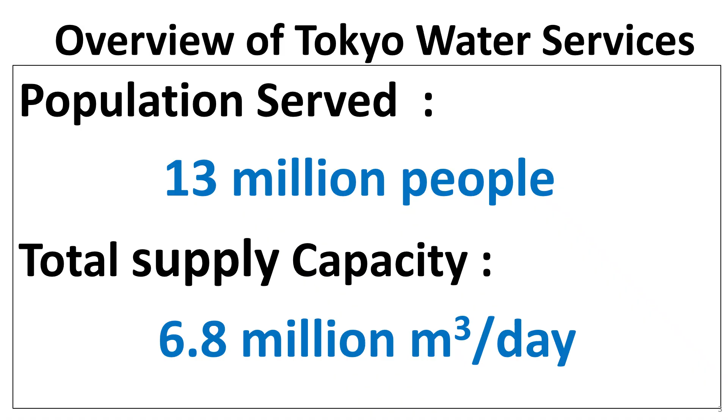I would like to show you what non-revenue water is in Tokyo. Now, the revenue water rate in Tokyo is 96%. The non-revenue water rate is 4%. The leakage rate is 3.5%, and others are 0.5%.

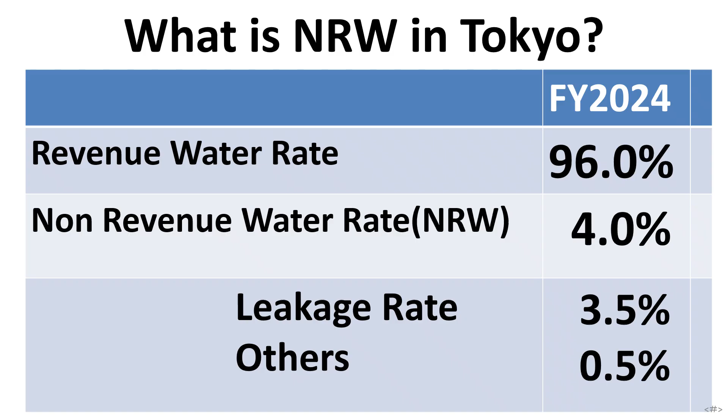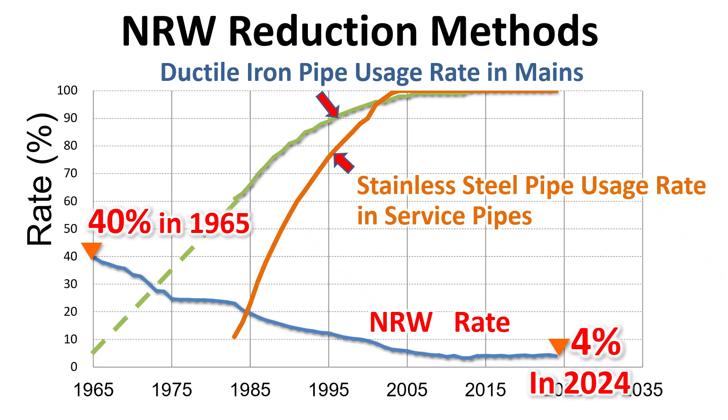This graph shows you the change in the materials used to make pipes, including the switch to ductile iron and stainless steel, and the reduction in the non-revenue water rate. 60 years ago, its rate was 40%, but the current rate is only 4%. These changes not only reduced the non-revenue water rate, they also helped strengthen the pipe networks.

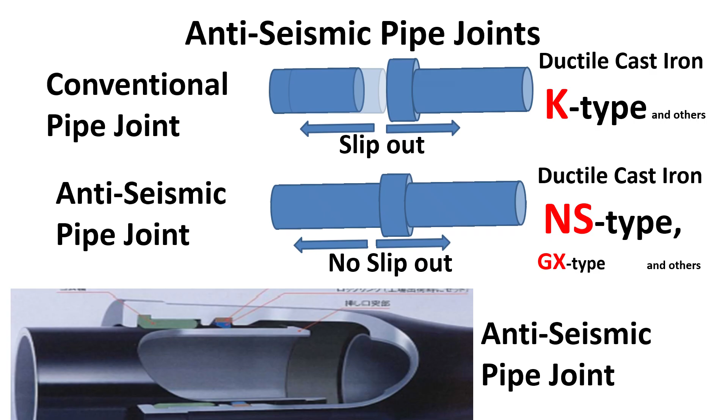Now I would like to focus on the anti-seismic pipe joint. Conventional pipe joints do not withstand strong earthquakes, which results in slip-outs. On the other hand, anti-seismic joints can help prevent this phenomenon. Tokyo Water adopted completely anti-seismic joint pipes after the 1995 Kobe earthquake.

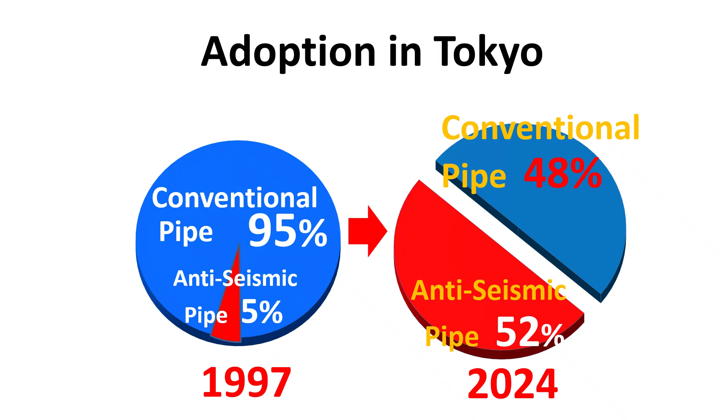Anti-seismic joint pipes as a percentage of the total number of Tokyo Water's pipes gradually increased from 5% in 1997 to 52% in 2024. That percentage is expected to increase to 66% by 2035. About 1.3% of the network is scheduled for conversion annually.

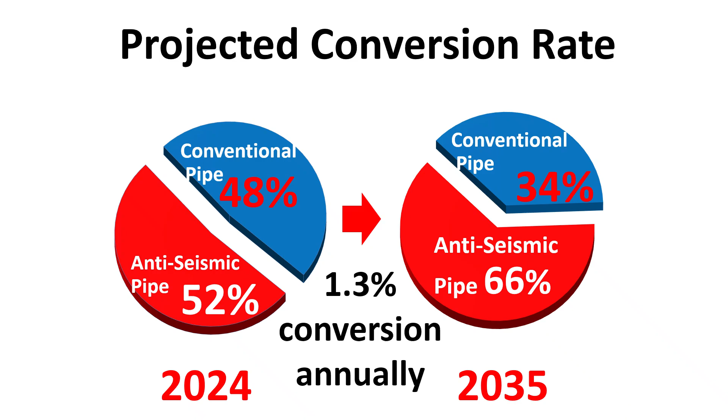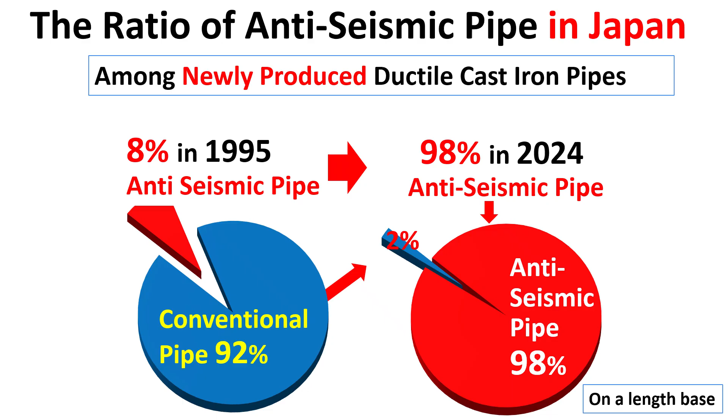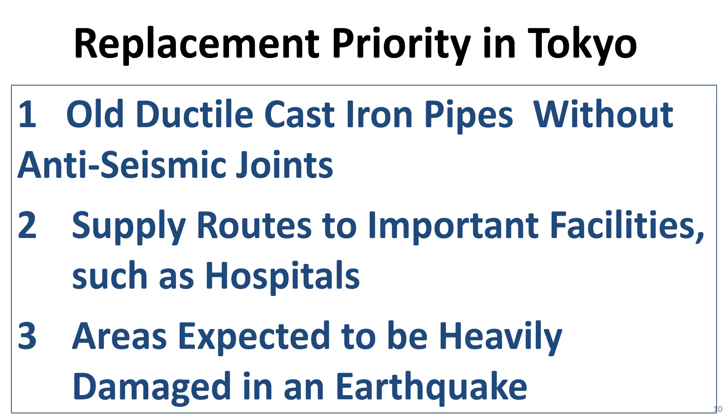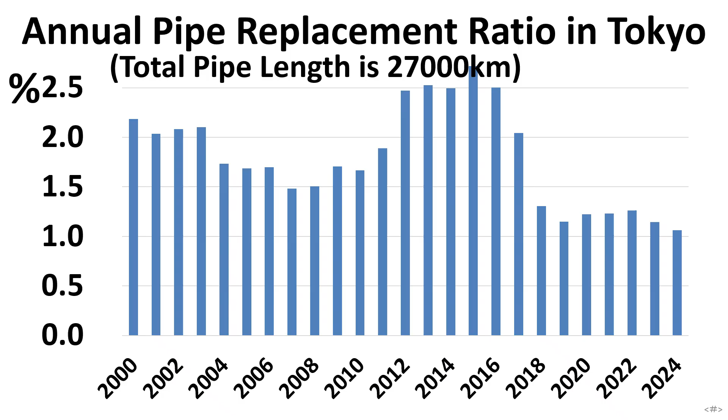This graph shows you the annual pipe replacement ratio in Tokyo Waterworks. Unfortunately, its ratio is recently reducing. Why is the pipe replacement ratio not progressing in recent years? The annual volume of pipe replacement in Japan has been decreasing for 20 years. Shockingly, it is now less than half of what it was 2 decades ago.

Looking at the breakdown, the replacement of ductile iron pipes, the mainstay of the system, has dropped to 40% of its former level, while polyethylene PE pipes are on the rise. The use of polyvinyl chloride PVC pipes has plummeted, resulting in a combined total for plastic pipes that is only 49% of the volume seen 20 years ago.

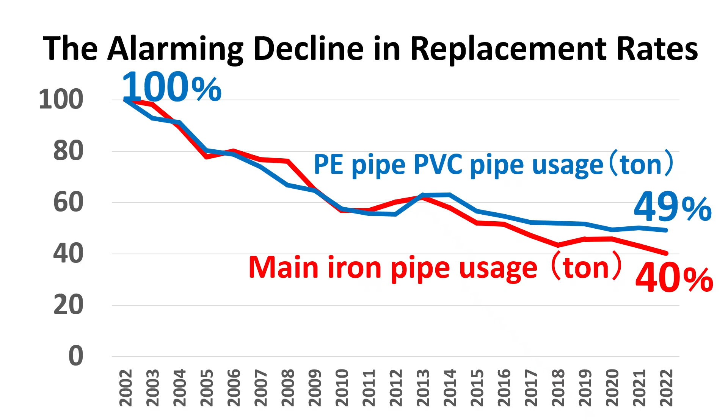The replacement rate is annual replacement length divided by total network length. It has fallen from an average of 1.4% 20 years ago to a mere 0.6% recently. At a rate of 0.6%, it would take over 150 years to replace everything.

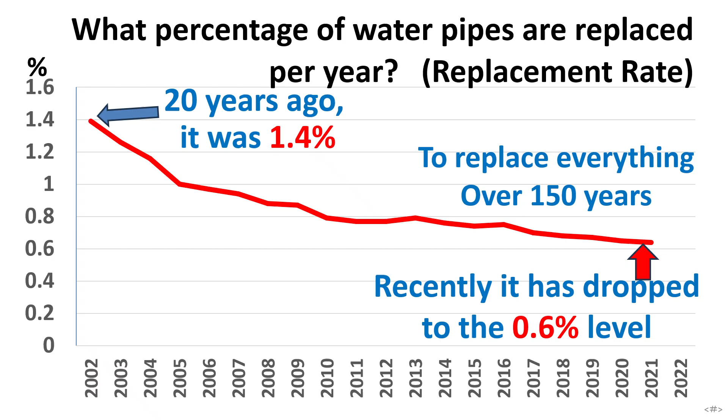Consequently, even in the 20 major cities where efforts are relatively high, the average seismic resistance rate is only about 30%. At current speeds, it will take another century to complete the task.

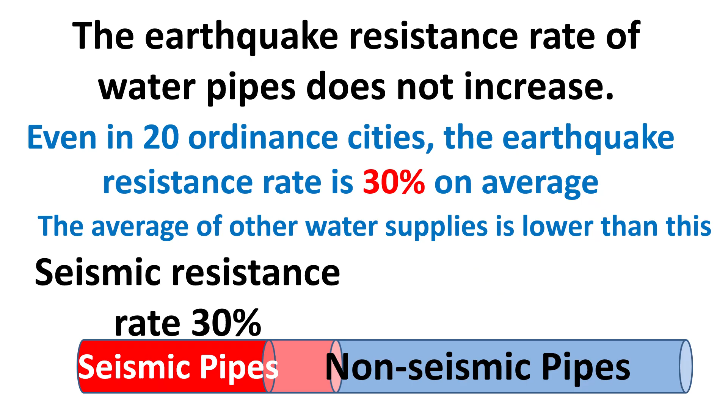Why is progress so slow? One major factor is a surge in the unit replacement cost: total annual construction cost divided by replacement length. In Tokyo, this unit cost is now 2.5 times higher than it was 20 years ago. Even with the same budget, we can only replace 40% of the lengths we once could.

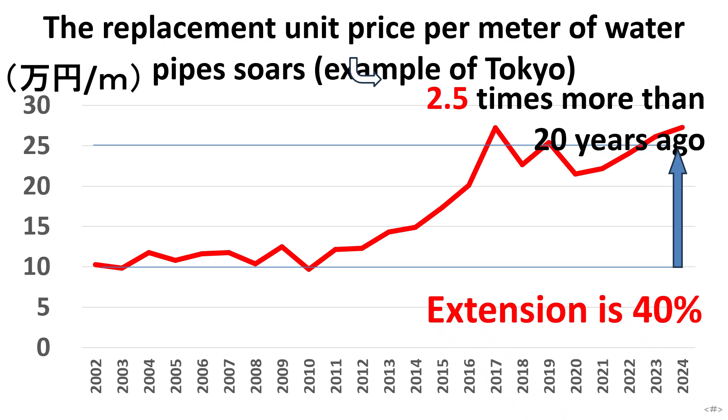This is due to a complex mix of factors. Labor shortages and low profitability for contractors have led to frequent failed bids where no one bids, which in turn drives up contract prices.

Another factor is a decline in water revenue. Total revenue nationwide has dropped from 3 trillion yen to 2.6 trillion yen, a 12% decrease over the last two decades.

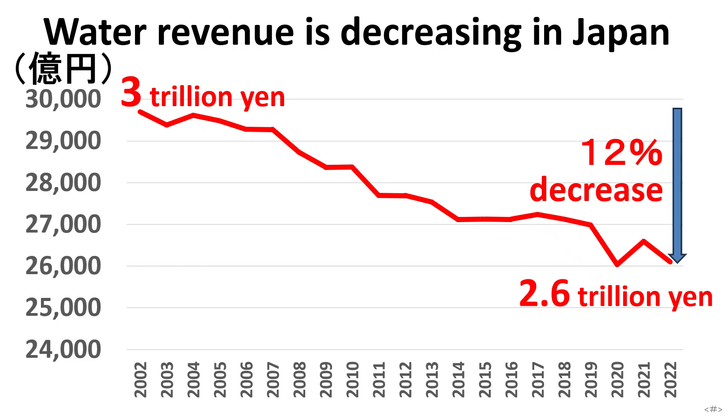The causes include a shrinking population, lower per capita usage, and a decrease in high-volume users. The fact that water rates have not been raised during this period is also a major contributor.

The left side shows spending from 20 years ago, and the right side shows current spending. As essential expenses like electricity costs rise, water utilities are forced to delay pipe replacements to balance their shrinking budgets.

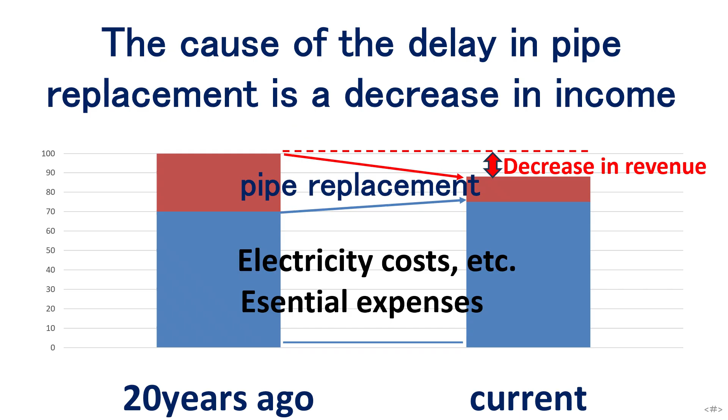Now, I would like to talk about where water leaks occur in Tokyo. The repair of service pipe leaks accounts for 97% of the total number of leak repairs on the distribution system up to meters.

Therefore, it is very important to reduce service pipe leaks.

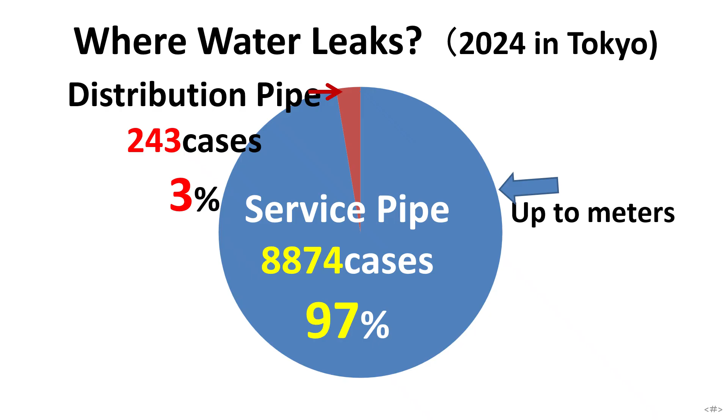This picture gives us a general idea of the boundary of responsibility between a utility and a customer. In Tokyo, that boundary point is at the water meter, although service pipes themselves actually belong to customers.

A stainless steel service pipe is installed underground between a branch fitting from the main under a public road and the water meter on a customer's private property.

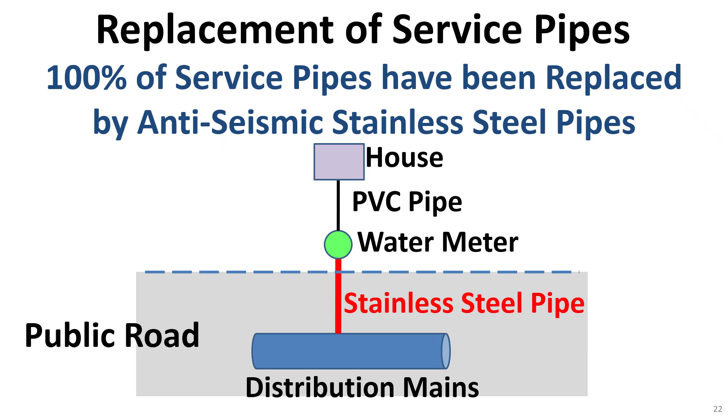For the pipe material, Tokyo Water chose SUS 316 over SUS 304. In 1980, although it was more expensive initially, it withstands corrosion much better and requires less post-installation maintenance.

In 1998, we added a corrugation to these pipes. Combined, this gives us highly flexible, corrosion-resistant service connections that handle earthquake stress well. This is the same as the one used in Taiwan.

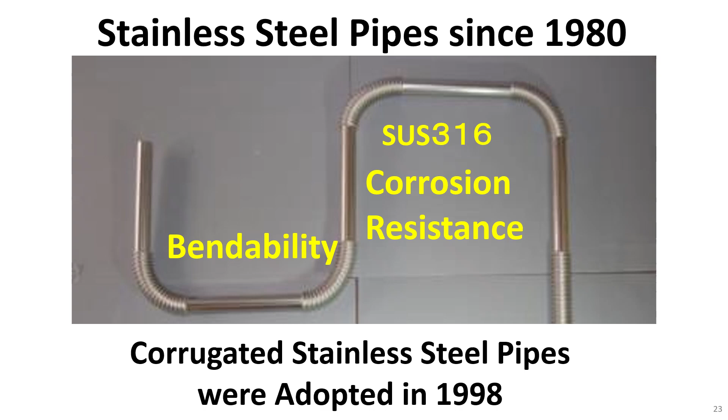Please let me explain another problem with service connections. Around 15% of customers' lots do not face public roads, and service pipes to those customers pass under private roads. One result was the creation of weak PVC pipe connections.

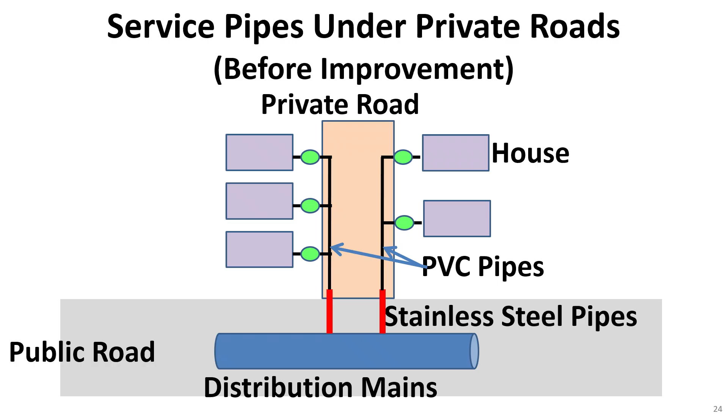In 1995, Tokyo Water addressed this problem to reduce the risks of leaks and earthquake damage, and that plan was accelerated after the 2011 Great Earthquake.

Tokyo Water has installed distribution mains under private roads and replaced PVC pipes with stainless steel pipes up to meters. And at the end of mains, a fire hydrant is installed. Of course, those distribution mains are anti-seismic ductile cast iron pipes, which we call NS type or GX type.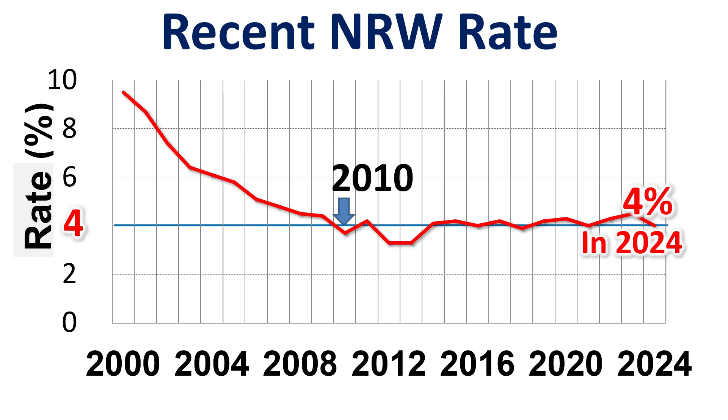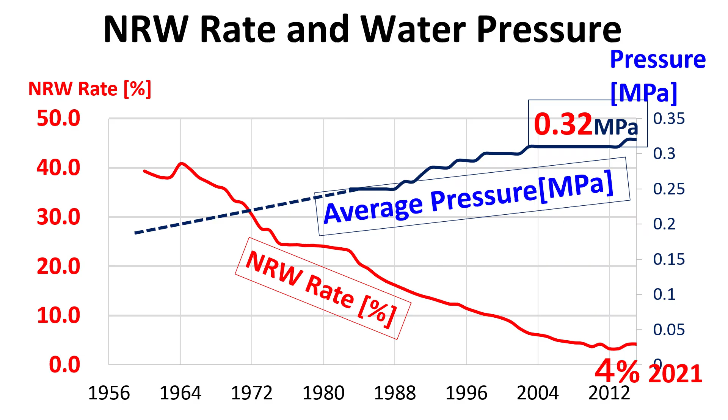In Tokyo, we have increased the water pressure so that even three-story buildings can be directly connected to the water supply. In these circumstances, we have been lowering and maintaining the non-revenue water rate.

I would like to talk about why replace the pipes again. The first reason is that water supply is not suspended in case of earthquakes. The second reason is to reduce the non-revenue water rate. Recently, earthquake countermeasures have become more important than non-revenue water reduction in Tokyo.

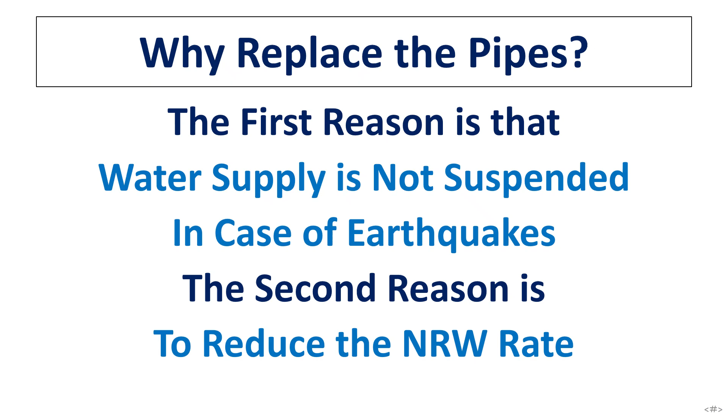I also talk about cost effectiveness of pipe replacement. I think cost effectiveness is a little weak from the viewpoint of only non-revenue water reduction. However, it is very strong from the viewpoint of earthquake countermeasures in Tokyo.

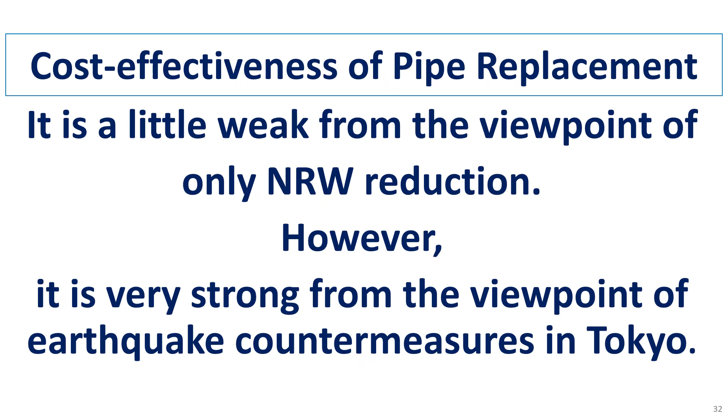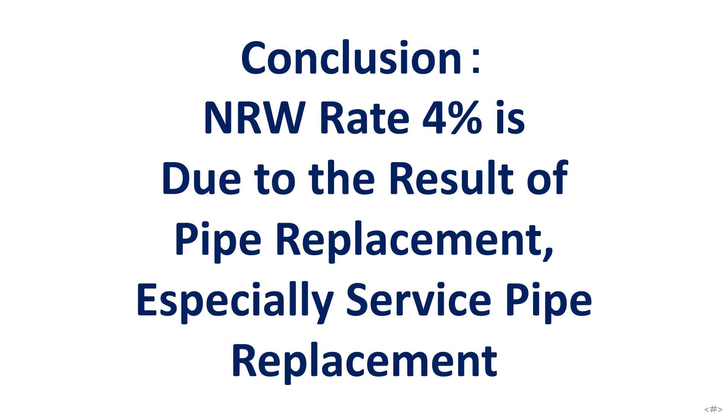In conclusion, the non-revenue water rate of 4% is the result of pipe replacement, especially service pipe replacement. I would like to emphasize that pipe replacement contributes not only to keeping the non-revenue water rate at 4%, but also to earthquake countermeasures, to keeping water quality clean, and to gaining the trust of citizens.

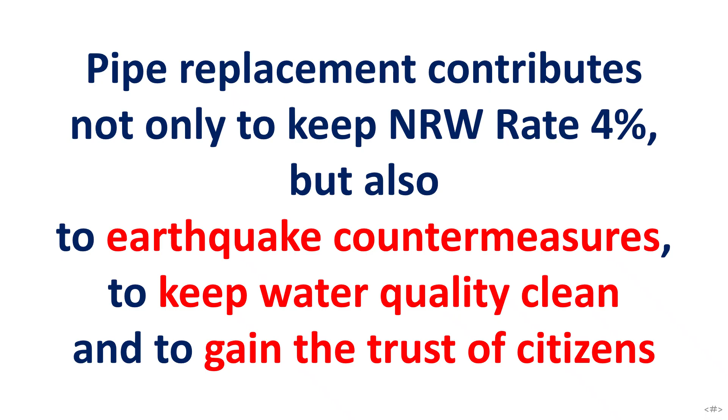From now on, I'll talk about ESG initiatives in Tokyo Waterworks. Tokyo Waterworks Bureau announced ESG initiatives in 2025. From now on, I will introduce some important topics from among them.

This picture shows a water supply station with a direct water distribution pump, which was completed in 2023. This system has two characteristics utilizing receiving water pressure. One is that there is hydropower generation before entering the reservoir. The other is that there is a direct water distribution pump using receiving water pressure. This water is distributed in combination with pump water from the reservoir.

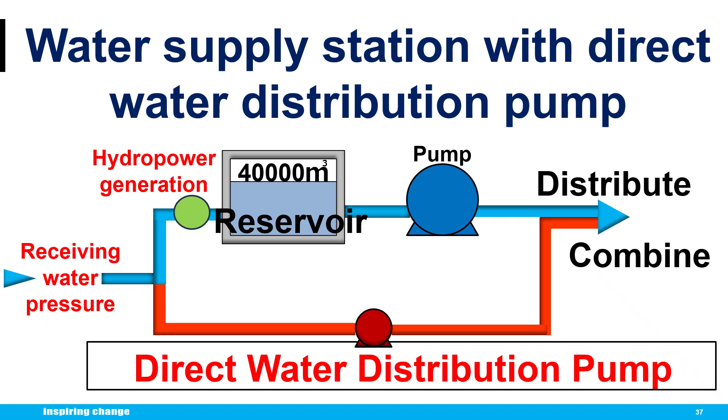Next, I will show you the introduction of solar power and hydropower. The total output of solar power is 10 megawatts, while the total output of hydropower is 3 megawatts.

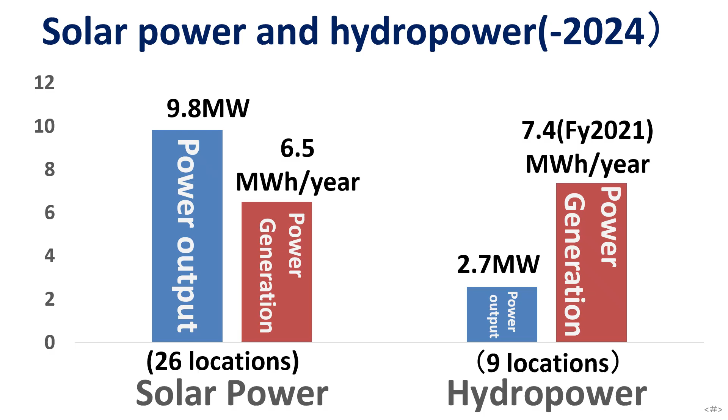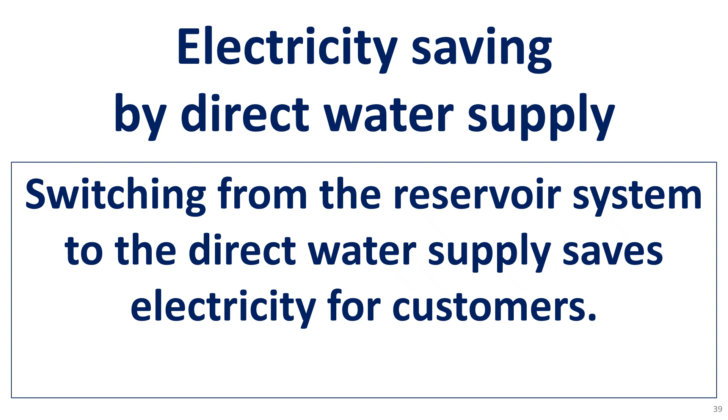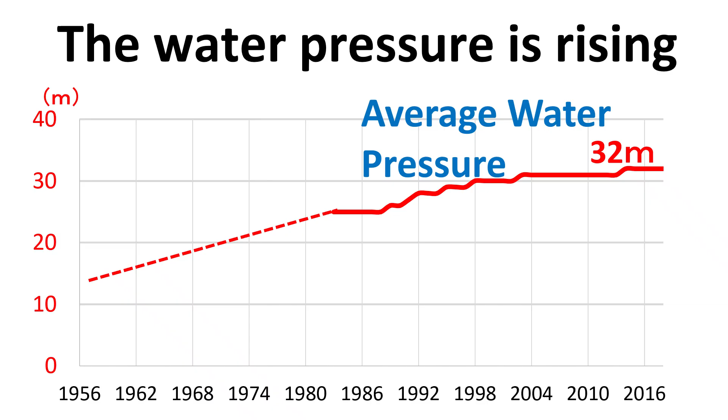Next, I would like to talk about electricity saving by direct water supply. Switching from the reservoir system to the direct water supply saves electricity for customers. As I mentioned before, the water pressure is rising gradually. A three-story building is supplied with water directly without a pump everywhere. The minimum water pressure is 20 meters and the average water pressure is 32 meters.

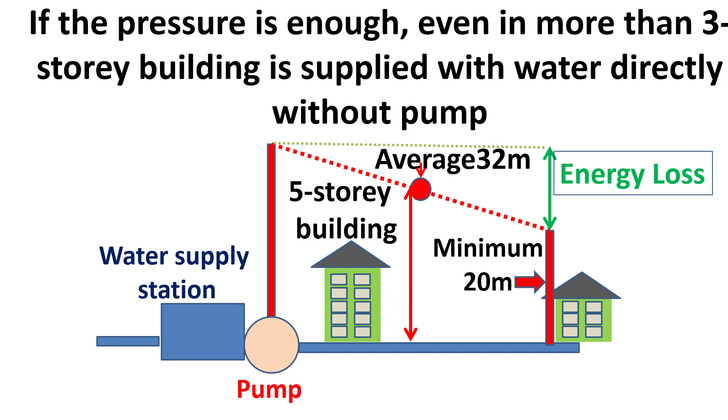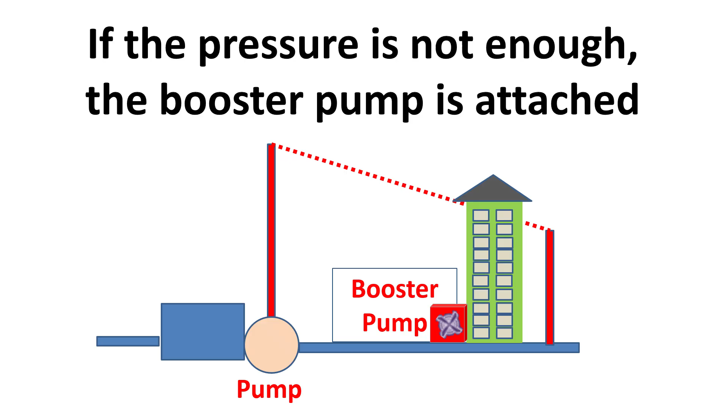If there is enough pressure, even buildings more than three stories are supplied with water directly without a pump. If the pressure is not enough, a booster pump is attached. In buildings with more than 16 floors, an additional booster pump is attached to the middle floor to supply water.

The percentage of direct water supply in newly built buildings with 3 stories or more in 2024 in Tokyo is over 90%.

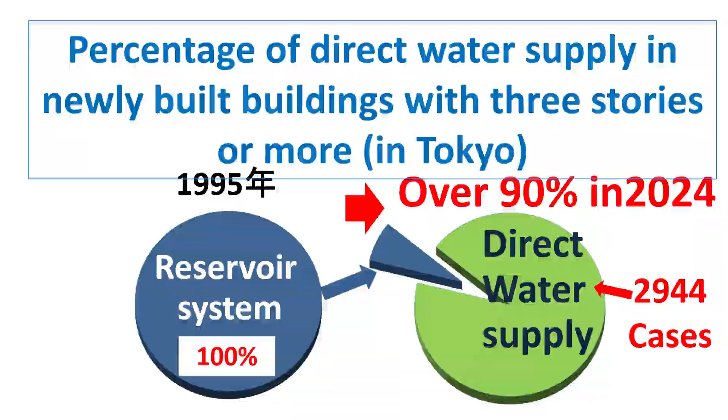Existing buildings have also started to convert their supply systems from reservoir type to direct type. At its peak in the 2010s, as many as 3,000 buildings in Tokyo were converted to direct water supply system annually. This number is the same as the annual number of newly built buildings that use direct water supply, as I mentioned before. Recently, the number of converted buildings has decreased, but even so, 1,000 buildings are converted to direct water supply system annually.

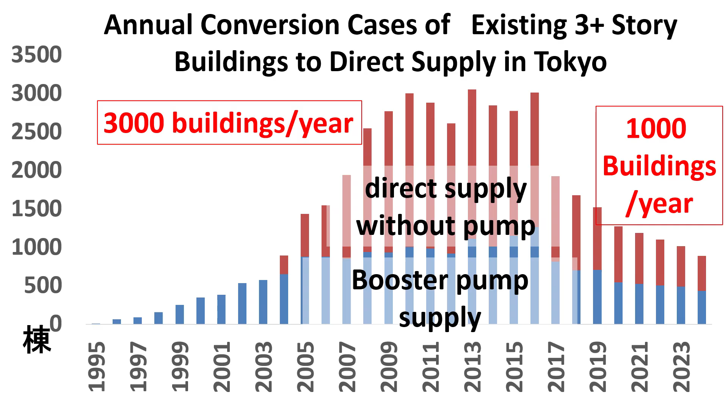Receiving reservoirs were equipped in most buildings 3 stories or taller in 1995. Today, the number of buildings with direct supply or direct booster pump systems is more than the number with a receiving reservoir system.

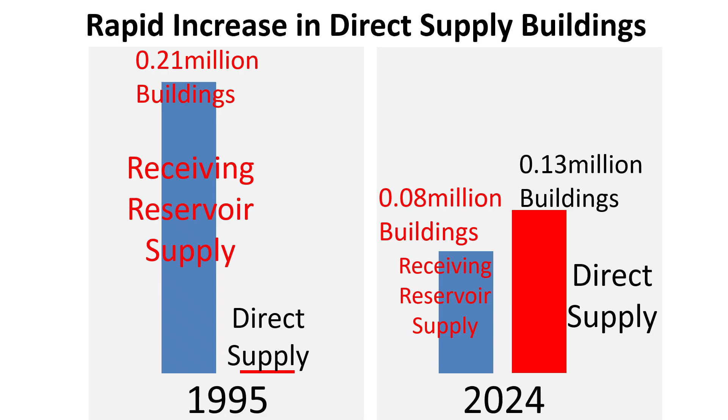Please let me summarize the merits of direct water supply. First, such systems save energy. Second, water is not exposed to the air, so deterioration risk is minimized and quality is preserved. Third, there is no need for receiving reservoir maintenance. This also saves not only energy, but also cost and labor. Related to this, the initial cost and maintenance cost are much lower.

The last merit is related to space in megacities. Conversion means space is created. New installations mean that space can be used more efficiently.

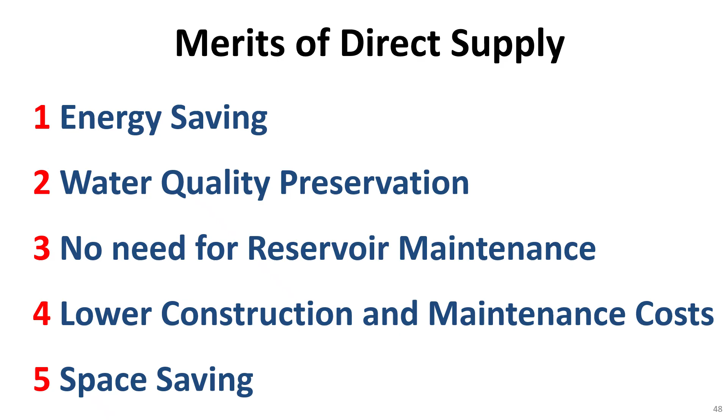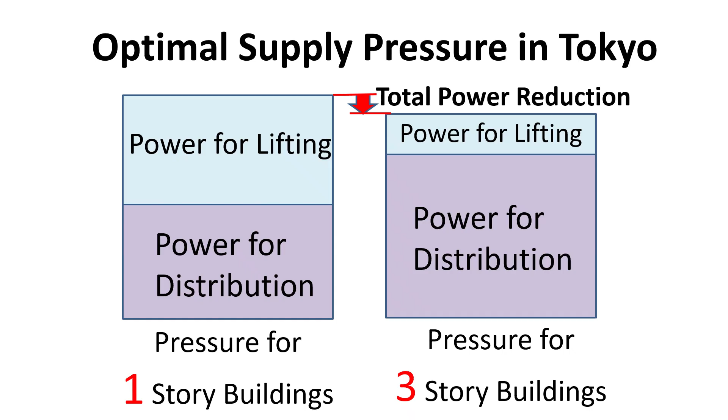This shows how providing pressure capable of supplying a 3-story building is a better choice in Tokyo, as it reduces the total power consumed. Thank you very much for your attention.